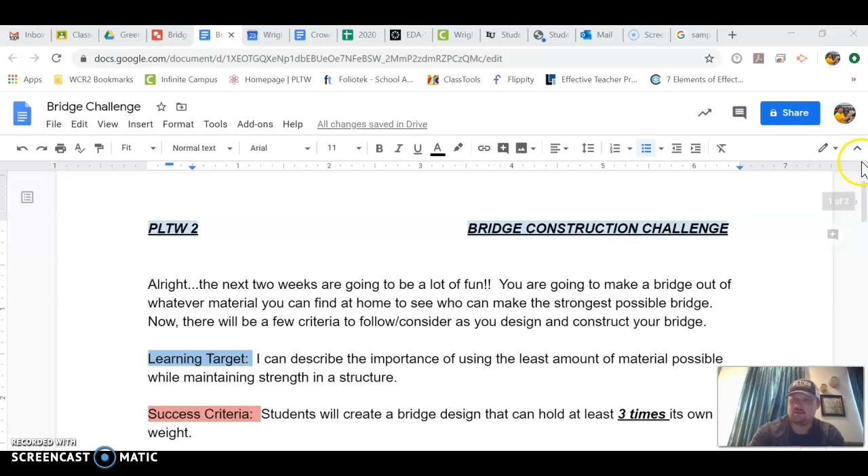Thank you. All right, so this week's assignment is going to be a two-weeker. Should be fun—it's the Bridge Construction Challenge. I'm trying to give you guys something that you can really have some fun with at home. It's got a real catchy original name, Bridge Construction Challenge.

You're going to make a bridge out of whatever material you can find at home to see who can make the strongest possible bridge. However, as with everything in our class, there's going to be some criteria you have to meet, so we'll get to those in a second. But first, let's look at the learning target and then what's going to measure your success on this.

I can describe the importance of using the least amount of material possible while maintaining strength in a structure. That's actually something that's used in daily life for anybody building something or making a product—they want to use as little material as possible without sacrificing quality. Less material, less cost. There's your economics in one sentence.

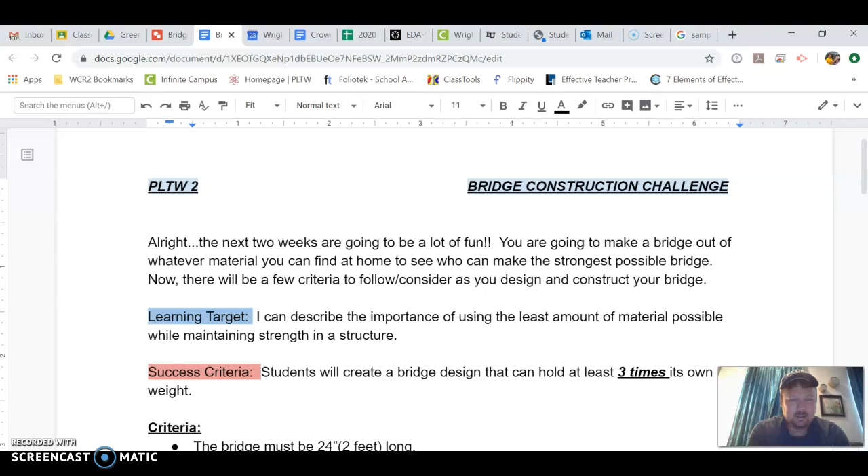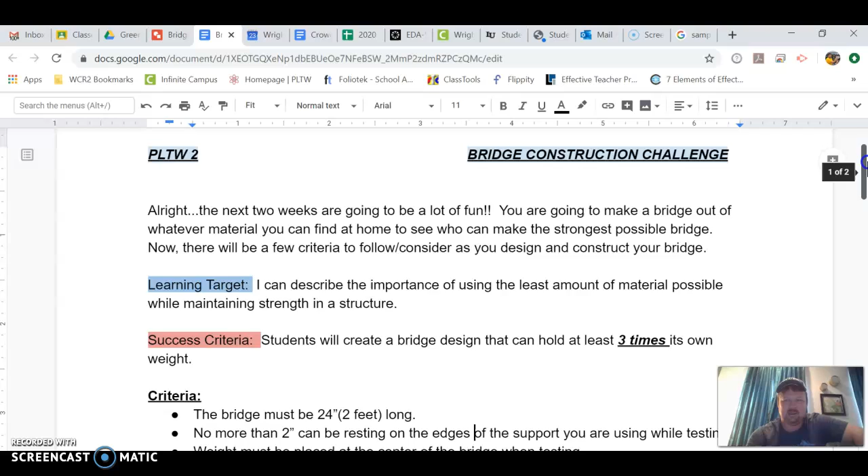To be successful at this project, you're going to have to create a bridge design that can hold at least 3 times its own weight. That sounds really tough, but it's not—we'll get into that here in a minute. The criteria you're going to have to deal with here is that the bridge must be 24 inches, or 2 feet long. So exactly 2 feet long.

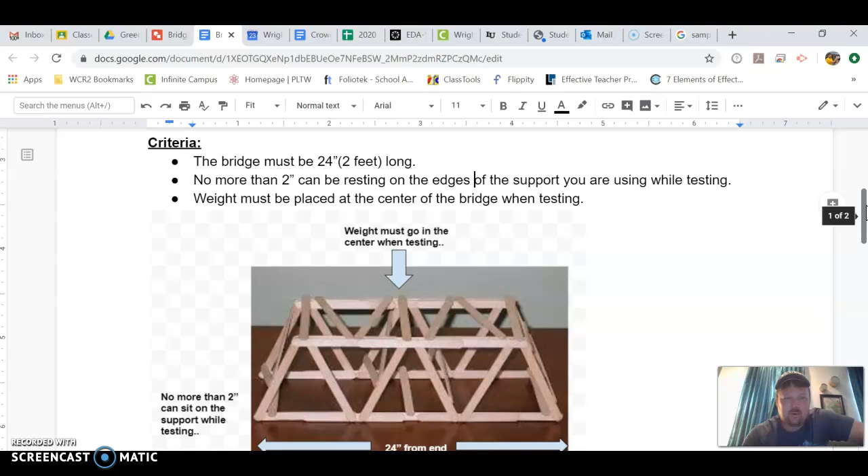No more than 2 inches can be resting on the edges of the support while you are testing. So, for instance, right in this area, there will have to be 2 inches of the bridge resting on the part that's being supported on this side and that side. I've put a little note right here.

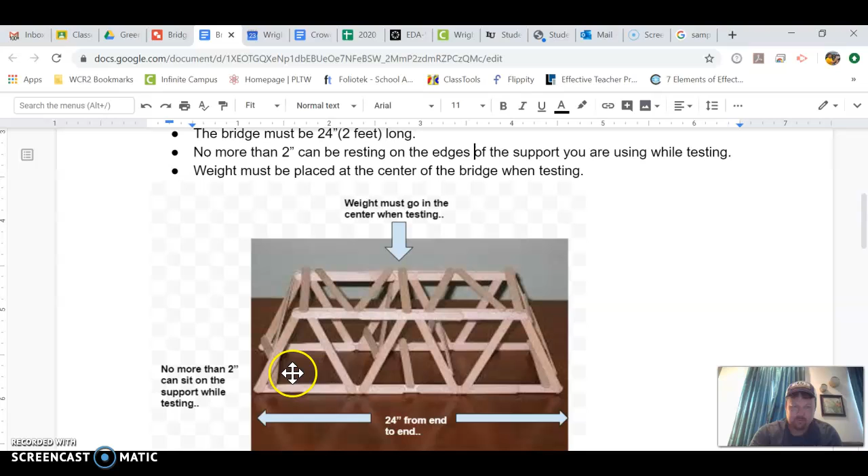And then right here, the weight must be placed at the center of the bridge when testing. So even though my arrow is a little wonky there, make sure that you are putting your weight right in the middle. Also, I wouldn't put anything right here like this one has, because you're not going to be able to put the weight down on it. I would put more of the structural components down here. I just use this as an example, which there's a note there for you.

You don't have to make it out of popsicle sticks, I just use that to illustrate the rules. I've seen people make them out of spaghetti noodles, straws, and masking tape. It's whatever you want to use—the lightest, strongest material.

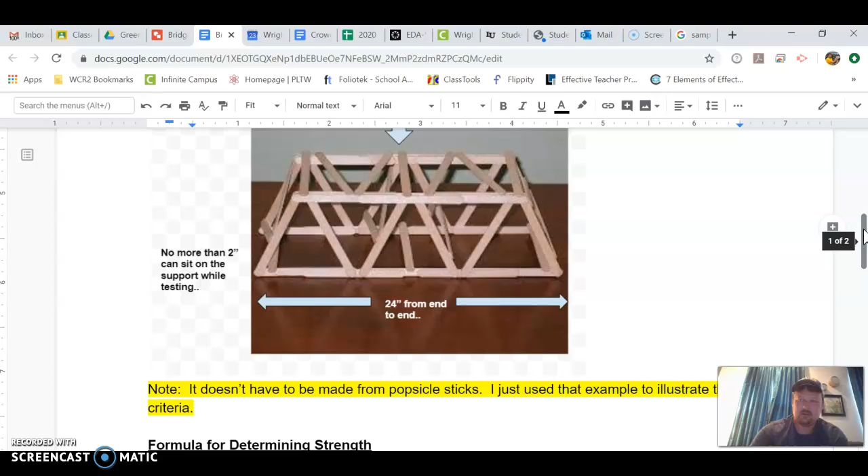And here's how we determine the strength, okay? Because if I didn't put this criteria on there, somebody could just slap a 2-foot 2x4 over and have their little brother stand on it. Obviously, that's going to be pretty strong.

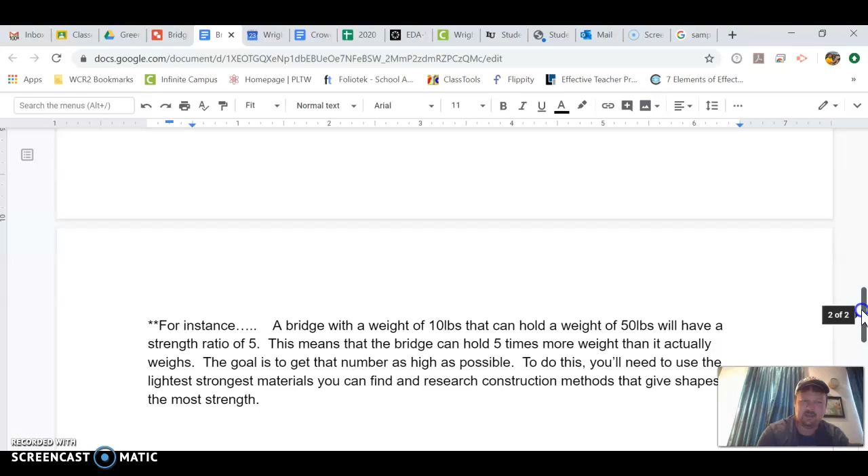But to keep the playing field even, the strength of the bridge is going to be determined by the ratio of how much the bridge weighs versus how much weight the bridge can hold. And like I said, this is a common practice in industry. So here's an example: a bridge with a weight of 10 pounds that can hold a weight of 50 pounds will have a strength ratio of 5.

That means the bridge can hold 5 times more weight than it actually weighs. So you only have to do 3 times. So if you can make a bridge that weighs 10 pounds that'll hold 30, you're good to go. And 10 pounds is kind of heavy. I mean, if you're going to be using popsicle sticks or spaghetti or whatever you can find around the house, that's probably going to be a lot less than 10 pounds.

One thing to remember too is whatever unit you weigh it in, we've got to use that exact same unit on how much it can weigh. So if you weigh something and you know how many pounds it is, but you need it in kilograms or grams, just make sure you convert. And if you have a question on that, you can email me and ask.

So basically, to do this, you'll need to use the lightest, strongest materials, and then you can just research the methods you want. You can see which shapes are the strongest. There's nothing else on there, and just have fun with it.

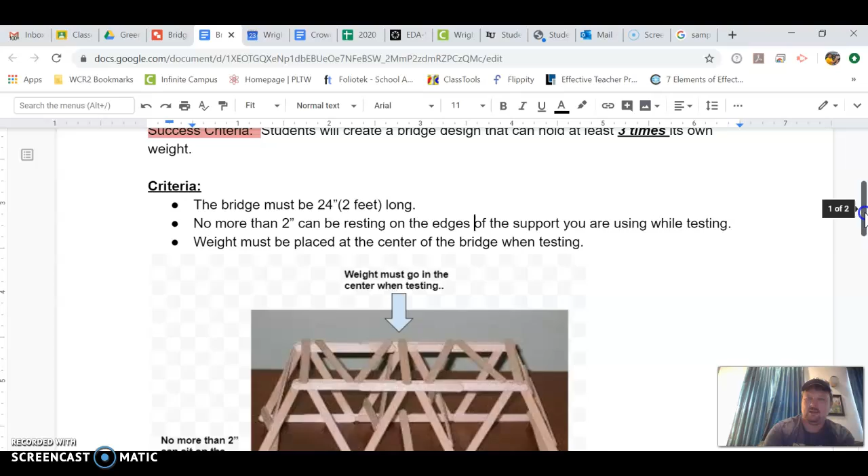Like I said, this is going to be a 2-week deal, so we're going to use this coming Tuesday to have a Zoom meeting where I really want you to attend because I'd love to see pictures of your bridge. I'd love to see some of the construction methods you're using. I want the other kiddos to see it too, and also just to kind of shoot the breeze because we're all bored too.

Yeah. So Tuesday will be a Zoom, and then Thursday will also be another Zoom to see more progress and how it's going with you. So this is a 2-week assignment. I'll send out email reminders and calendar invites for all this. Zoom meeting Tuesday, the 28th. Zoom meeting Thursday, the 30th. Oh, and then another Zoom meeting on May 5th. And then it'll be due on May 7th.

So take your time. Don't work on the bridge all day to avoid your ELA, math, or whatever. Okay. Do this on the side. Have some fun with it. You don't have to wait until the Zoom meetings to send me pictures or to send me a video. Encourage your parents to have fun and work with you on this. I want this just to kind of be a fun activity.